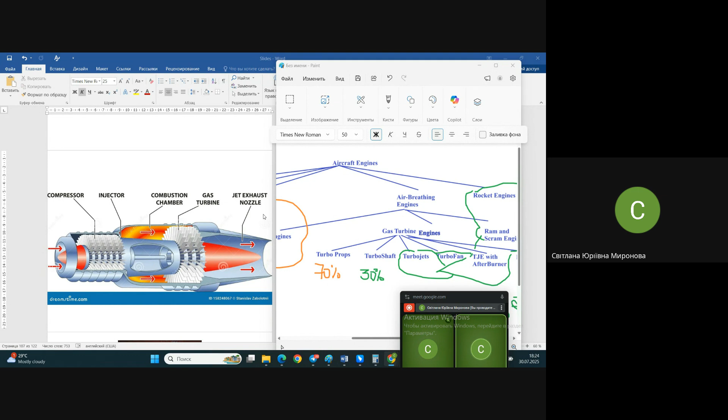How to rotate it? It's auto-rotating inside the engine due to the turbine. Hot air passes through the turbine. The turbine rotates because of this, taking a portion of energy from the air. It's placed, as it's called, on the same spool, you see right now. A combination of compressor and turbine mechanically on the same shaft.

And compressed air, turbine rotates the compressor, and compressor supplies a new portion of air. What is after the turbine, and how do we transfer this kinetic energy of air from high pressure into high velocity? This is also an interesting story.

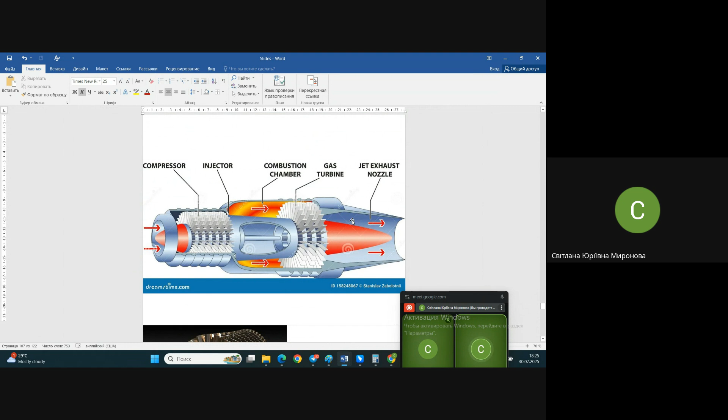Let me show you a picture; sorry, not successfully touched. But it explains very well what happens inside the engine and what I need you to pay attention to. It doesn't matter what exactly is given in this picture, but the top picture shows very well the geometry of the engine in general.

At the place of intake and compressor we have what's called a confuser, the shape which reduces the cross section inside the engine. Due to this, air passing through this place is losing velocity and increasing static pressure. Here is like the bottleneck, immediately in front of the combustion chamber. At the place of the combustion chamber, let it be the throat in this picture.

After this throat, with additional energy of fuel which is chemically transferred into kinetic energy of air, the air goes into the so-called diffuser. In the diffuser there will be, on the contrary, reducing of static pressure and increasing of the velocity of this airflow. That is the changing of parameters, not inside all the engine, it's only about one element of the engine.

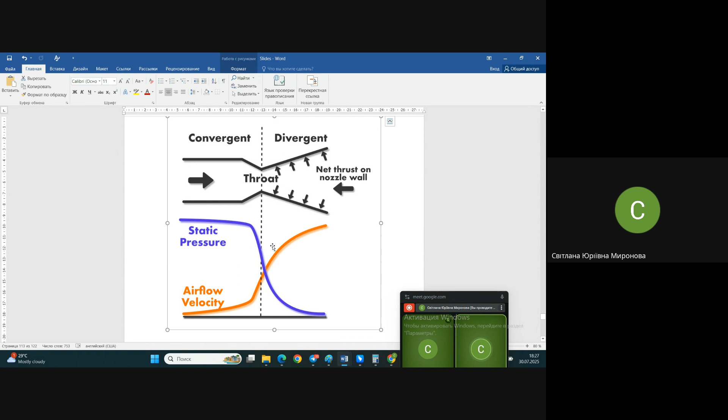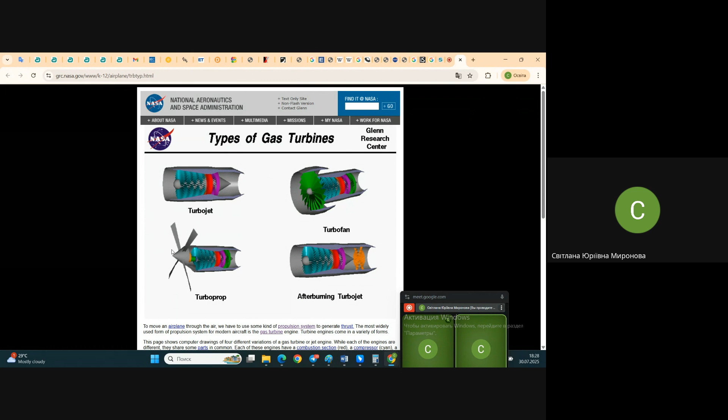Pay attention to the cross sections of all the engines. What we saw some seconds ago in that picture, now you see reproduced in cross sections of engines. At the end of the engine it seems like it does not correspond, it seems like it's reducing in cross section. But there is a so-called central body inside, and it creates a channel which near this cross section is much more narrow. Compare it here, it becomes greater and greater, so it's really a diffuser inside. And in any engine we see the same story: confuser, something like a throat, and next a diffuser which should increase velocity.

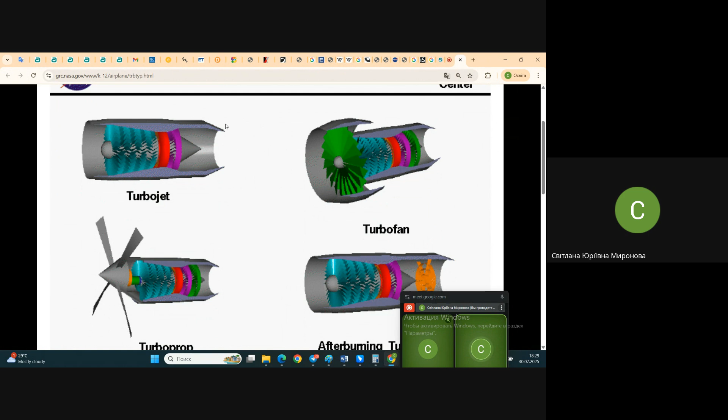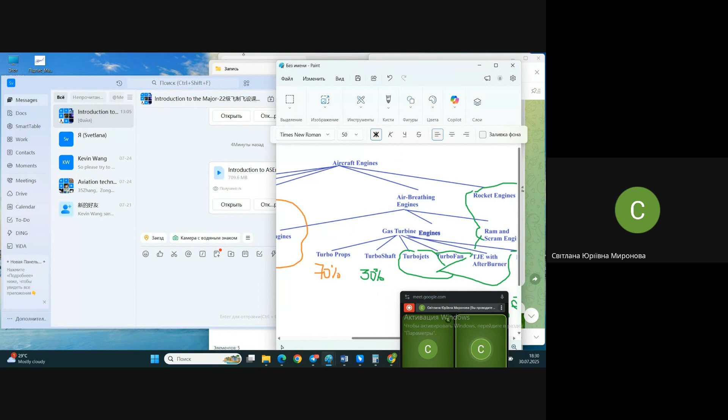The only task for us now is to understand how it works, why people torture themselves with improving those engines, why it's so necessary. Here I will leave the same site with some simulators; next we'll try to use it. Right now we will try to see something and try to understand my explanation. I hope I'll be successful.

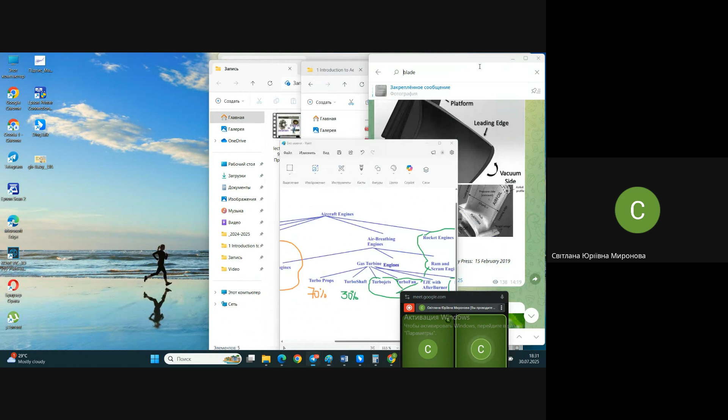I lost. What do I need? Oh, I have prepared. Okay, there is the gas turbine engine, and its general core we already understand, I hope, and the combustion chamber. Let me show you some pictures of the compressor, turbine and combustion chamber in real, not in beautiful schemes.

I lost it. I lost it. We will find it, no problem. Almost found.

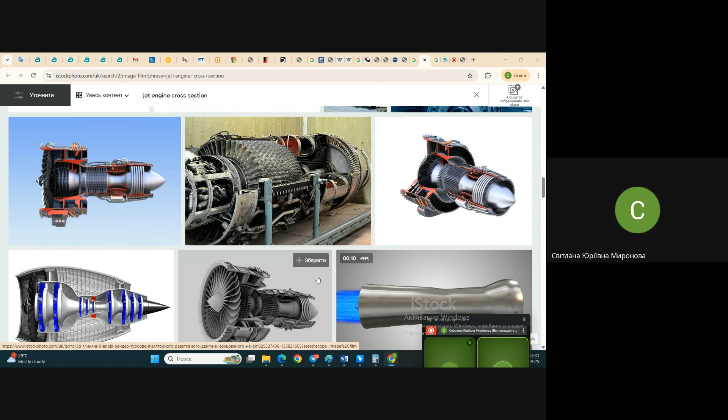Now we see a collection of photos proposed to be bought. You see real engines, similar to what we might see in our laboratories that our students use for practical classes. Compressor, and next some place that looks like cylindrical bodies. Pay attention, that is the so-called can type of combustion chamber.

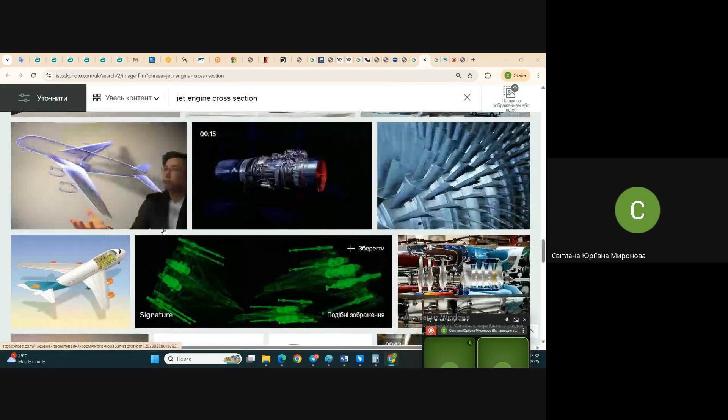What it looks like was visible here. Wait, disappeared. I meant to increase it and instead I spoiled everything. Here it is; I will not risk increasing it any longer. Look at this compressor. Next you see the throat immediately before the combustion chamber, and separate bodies, like separate capsules, cans, the so-called can type of combustion chamber. And next, the exhaust of the combustion chamber passes to the turbine, and the central body. What it looks like, here it is.

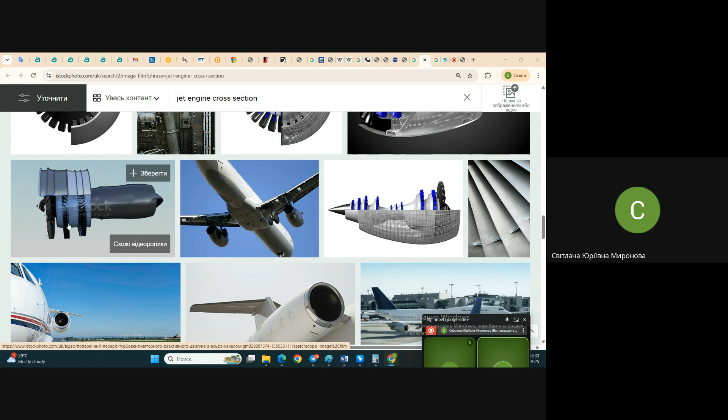Would you be so kind, please, to show? No, no, I have understood. Not much interesting actually for me. I've seen.

I have a video, and I'm going to send it to you. A video about a turbofan engine. At least here it's visible that the engine is all surrounded with additional systems, with pipes, with electrical systems, and so on. Let's close this and let's go into explanation.

I even tried to do it. I was training to do it before the class, so it looks more beautiful, let's say.

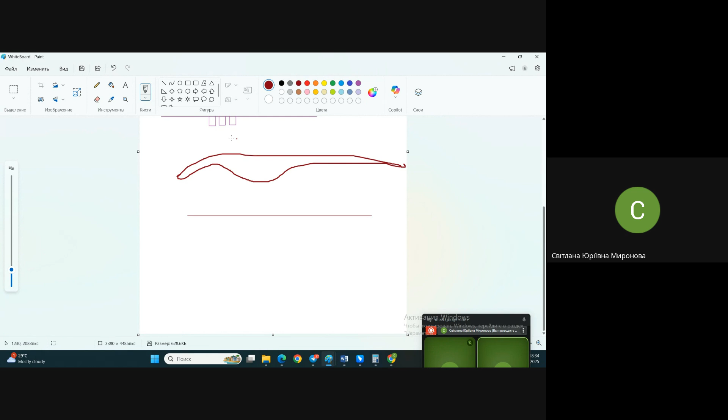Well, once again, we have an engine to make. We need an engine, and in this engine, somewhere in the housing, here is the housing element. And inside the housing element, we need to have first the confuser and next the diffuser. So usually it looks like this, and next is this housing element. And let's place it here. Somewhere here, it will be the combustion chamber.

We do remember. So somewhere here, there will be fuel nozzles. Some of them. The combustion chamber might be of can type, it's most typical, but it also may be the common combustion chamber, like the whole ring around the axis, around the spool of the gas turbine engine, and compressor.

Look, the compressor looks like this, approximately. We have seen it here in the photo. There are two different popular decisions. Both are popular. They have their differences, like advantages, disadvantages. Not the matter right now, but do remember that the compressor may be a so-called

axial compressor, through the axis. Air passes along the axis, not quite of course, but almost. And one more type of compressor is the centrifugal compressor, which looks like this. There you see it's a so-called multi-stage compressor. Each stage consists of a disc, and this disc is stuffed with blades. Now they are in radial directions.

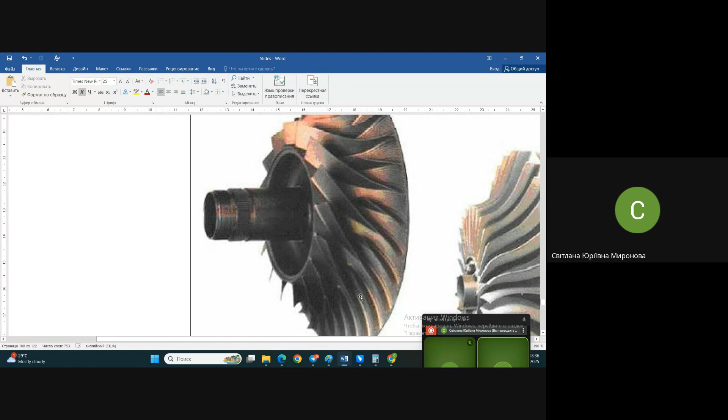In centrifugal, actually, those ribs, let's say, also have a blade-like shape, and this blade-like shape is additionally twisted to create complex ducts here. That one and that one, they are both placed in the confuser area. Either or. I've seen engines where it was hybrid. It means one portion of the compressor was made as an axial compressor and another one as centrifugal.

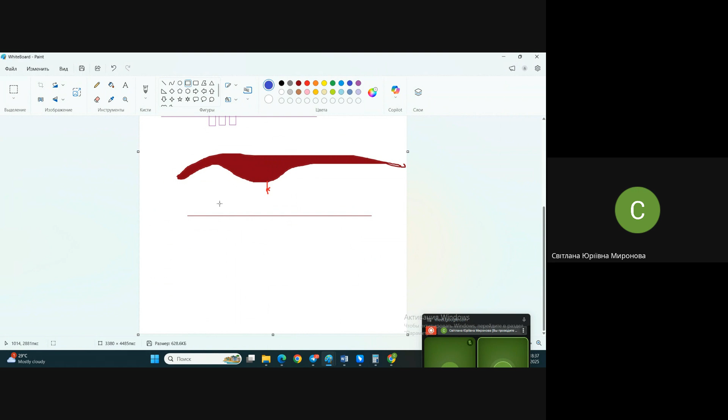Whatsoever, I will draw schematically. An axial compressor, not so important which one. And I'll draw it in blue color to emphasize that this thing is yet cold compared to the temperature in the combustion chamber. And I made now one stage of compressor here.

Next, I'll do here one stage of turbine, somewhere here. Let it be the turbine here. The turbine is necessary to rotate the compressor, we do remember. Everything is on a common shaft. I draw only the half, you understand. At some moment it's necessary to start rotation. Rotation has started, the engine is started, and next it's working on a continuous cycle of burning.

How to increase the thrust in such an engine? How to make it more efficient, more powerful, more capable? Maybe we need to give more fuel. We may give more fuel, but this trick will work only in case you have more air. So first we need more air. How may we get more air? One way is to increase the engine dramatically, and this engine, of course, will not be for an airplane at all. What is another way? A quite obvious way is to increase the amount of these stages, of these discs with blades.

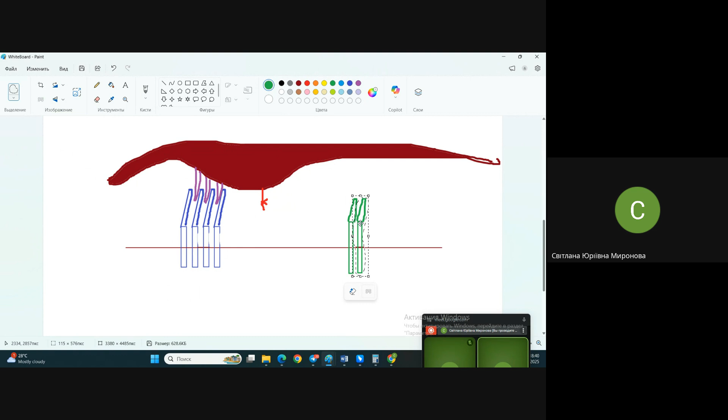I hope you understand it intuitively. What does it mean? Okay, we did it. It's quite clear that to rotate a heavier compressor, we need here a more capable, more powerful turbine. It also has increased. And a similar matter is with the turbine. It also has additional blades here. It's ducted in a special channel usually. I might even show you what it looks like.

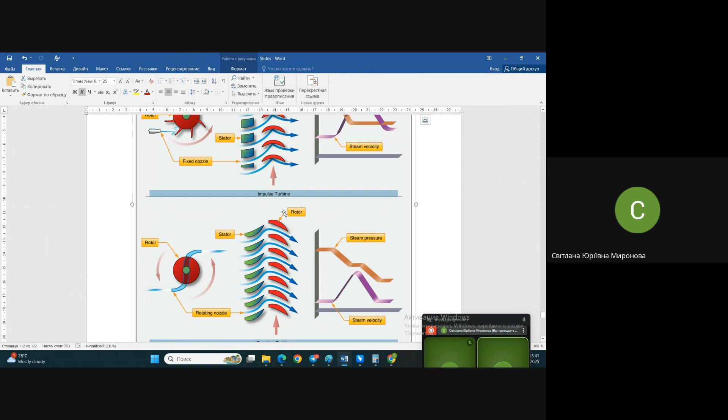I place it here. And you see, there are different types of turbine blades, but mostly, you see, this is the rotor of a turbine. Mostly they look like quite typical airfoils directed in the direction of flow, let's say. In contrast to the compressor, whose blades are also blades, but they are not so similar.

It's a very complex structure with inner holes for cooling. Why does it need holes for cooling? Because it's subjected to dreadful temperatures. How is it not melted at all?

It's so-called aerodynamical twisting, so the angle of attack is changed along the span, let's say, along the length of the blade. By the way, it's similar to the propeller of a turboprop engine, which is in front of the engine. It also looks like an aerodynamical airfoil, each blade of it, and this aerodynamical airfoil is twisted along the length of the blade.

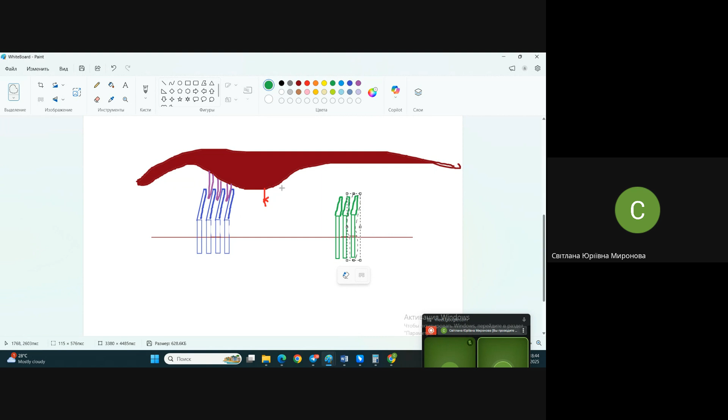Is there any other possible way to increase the capacity of the engine in this case? What people understood with some time.

One decision was: maybe we may compress, we may suck more air than necessary at this place, and burn only part of it. Most of the oxygen in the air will be burned and used here in this combustion chamber, and some portion of air still containing oxygen may be additionally burned in another place, in the afterburner, after the turbine.

And this resulted in the appearing of the afterburner chamber in the engine. So the turbojet engine and the turbojet engine with afterburner are very similar. The afterburner is just an additional combustion chamber at the end.

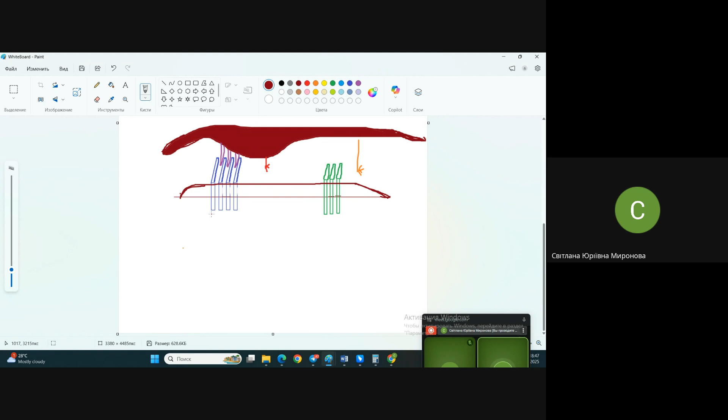Well, so that's not the way for passenger aircraft and cargo aircraft. What we really wish to have, once again, we need here velocity, high velocity.

How to increase the thrust of the engine. One way is to increase velocity, and another way, an extensive way it seems, is to increase the amount of air at this velocity. Somehow to increase the amount of air that passes through the engine. It's not compulsory necessary to burn this air.

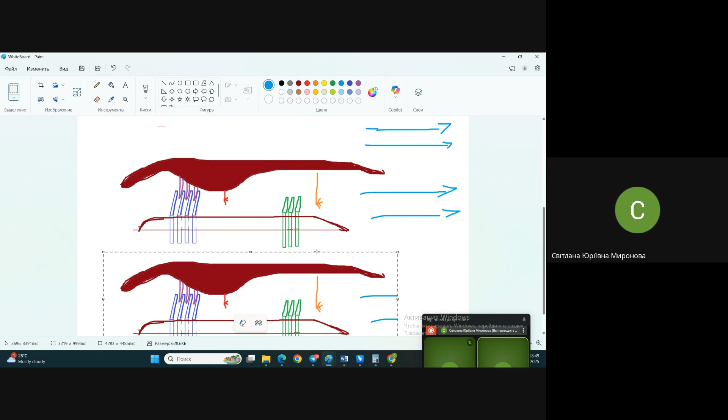We just like to accelerate this air somewhere in the engine and push it out. And what people did, understanding this, let's copy down this thing. Wait a second. I hope I do it. Oh, I did.

In order to place an additional element here... let's place it in front of the compressor. You remember we may use props. I already said a prop is efficient only up to some speed and up to some altitude, just because of mechanical strength matters. If speed of rotation needs to increase - once again, the problem is that 70% of thrust is created due to rotation of the prop in such an engine, turboprop engine. And to increase thrust, you need to increase either the size of this prop or the rotation per minute of this prop.

This is in order to give more air and more speed to this air. Increasing size of the prop? No, I already said you need to compare the size with the size of your airplane - maybe the prop will be too big. Increasing speed of rotation of the prop? It may mechanically break due to rotations.

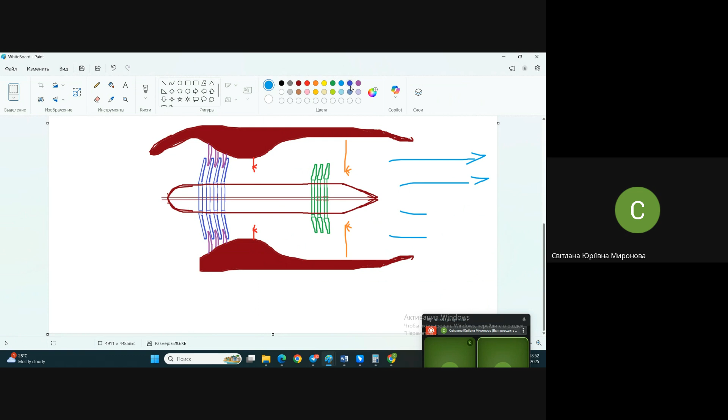In front, let's come back to this picture - in front of a compressor, let's place something, like this, little. Let's place an additional device, the so-called fan, and it has already only one stage - there's no need for several stages.

This fan is shorter in diameter than it was in the turboprop. It also looks like a prop, but this prop is more similar to the turbine, more similar to the compressor. It has a large amount of blades. The blades are shorter and they are hidden in a special channel.

Let's do here something like the beginning of the engine - they are hidden in an additional channel, and this channel is also profiled with respect to the rule that first we need... I will not try to draw it beautifully, I will just stop drawing at some moment. So here we have, as I said, something like additional housing with respect to the turbojet engine that looks like this.

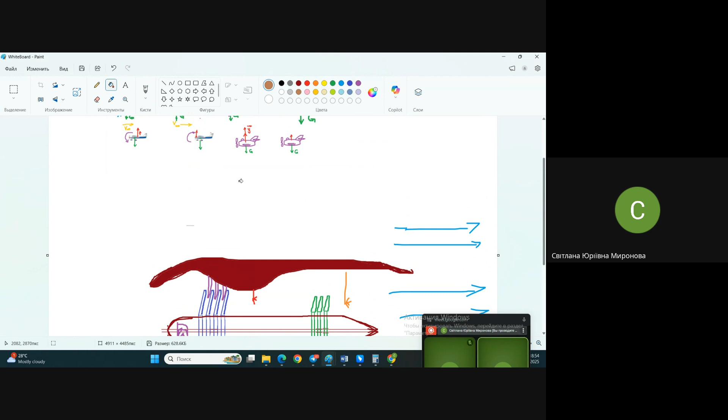Here we have added an additional element in front of the compressor. This element is named fan, and the fan also rotates together with the compressor. It rotates with the same rotational speed as the shaft itself - no gears, no intermediate devices between them. It just rotates, and rotation of this big fan results in passing air in two ways.

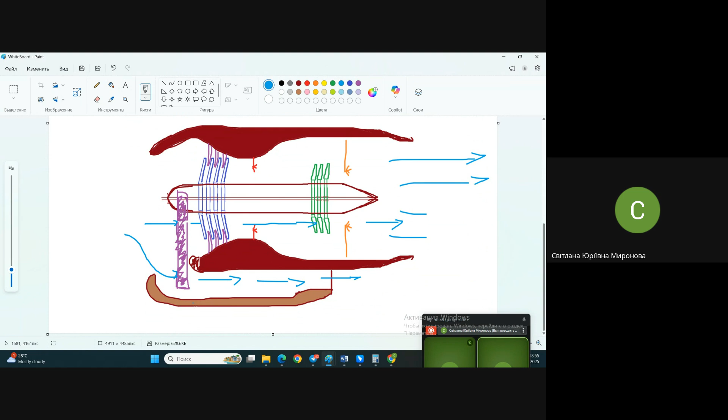A portion of air still goes through the inner duct of the engine like this, but another portion goes through the outer duct here, which is also profiled for the purpose of - not compressing air - but for the purpose that air velocity at the exit will be higher than air velocity at the beginning of this duct. So it's also profiled somehow.

And what is the result of this? When here we had accelerated air - for instance, at the top we had accelerated air symbolically, I show it twice now here - here we will have an amount of accelerated air through the hot channel, the so-called inner duct of the engine, and through the cold channel.

So some portion of air makes a bypass, passing by the engine, not through the engine, but by the engine. That is why those engines also have another name: bypass engines. The turbofan engine, in literature, somewhere on the internet, you might find it under the name bypass engines.

These bypass engines have a very important characteristic called bypass ratio. What is bypass ratio? It's the amount of air - let's show it symbolically - amount of air passing through the outer channel, let's call it cold, to the amount of air which goes through the inner channel, which I symbolically showed with another color, let's call it hot.

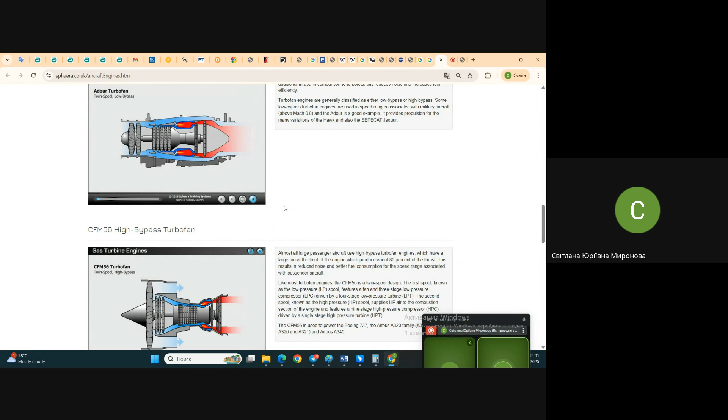What is visible here? Look, both engines are turbofan engines. Pay attention, it's visible — it has an inner duct, where the compressor is, and some air comes through the compressor to the combustion chamber and to the exit. And the outer duct you see here with the fan is so-called low bypass. Practically, this fan by size doesn't differ much from the compressor size.

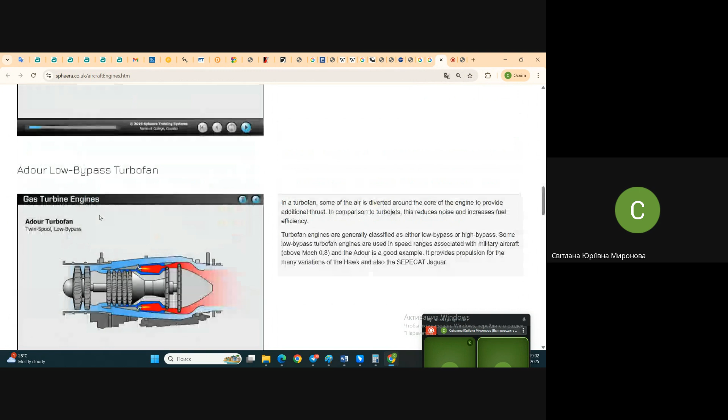Why it's called twin spool, by the way, I forgot to say — there is a so-called low pressure compressor first, and next a high pressure compressor. After each stage of the compressor, pressure increases and increases. Here is a two-stage turbine also, you see. The first turbine is mechanically joined with the high pressure compressor — this is the so-called high pressure turbine. And the second one, respectively, is inside this shaft, inside this spool, passing to the low pressure compressor stage. All of this rotates at different speeds.

And here we have mechanical joints also with the fan — the same type of engine, but another bypass ratio, and you already see what it looks like. Pay attention also to what is visible by the way — the intake bodies. You see the central bodies in the exhaust channel here, and they are not visible to compare, but here the intake central body of two engines is visible.

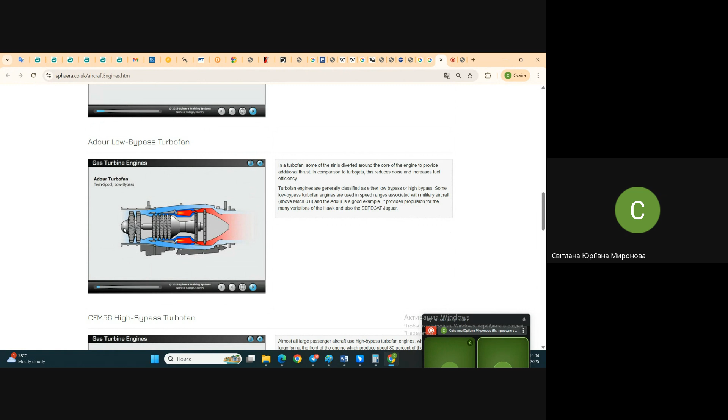How do you think — which one flies faster? Which one is for faster airplanes? Your propositions... you can't answer me right now. So, you understand the more sharp, more thin shapes correspond to higher speeds. You have seen this in examples of profiles, in examples of aircraft shape. And here is a more circular, more flat, let's say, central body on the intake. It means that this engine is designed to work with lower flight speeds.

I hope that we don't need any longer, and let's continue this story. Now, about bypass ratio engines, I hope I explained it to you. Additionally, I'm going to send you, as I said, a short movie. This short movie seems like an animation for children — it's a very simple, understandable explanation, and it's not boring, in contrast to my explanation.

Once again, we have an engine, a turbojet engine. Let's take a look, let's recognize them, let's look at the different engines.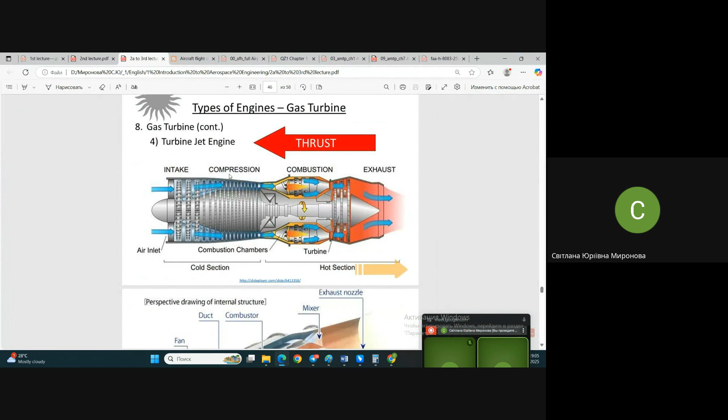Here is a simple turbojet engine. Oh, simple. It's simple, people. Trust me. That one is simple, with an axial compressor, with a combustion chamber next, and turbine, and exhaust channel, of course. Intake, compressor, combustion chamber, turbine, exhaust.

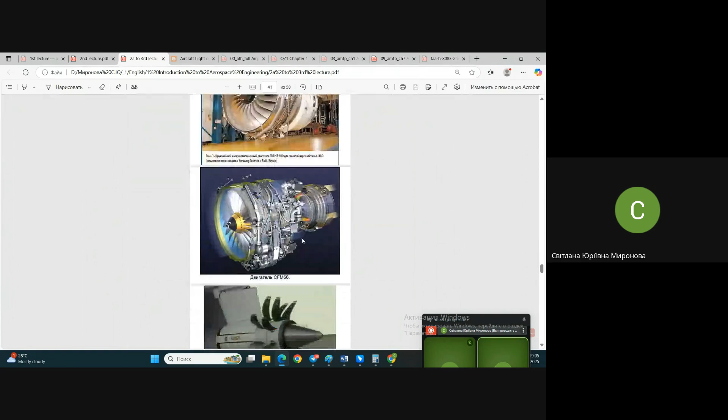Turbofan engine. Where is it? Where has it disappeared? In cross section. Turbofan engine. No, it's not cross section, but at least we see its typical shape. It's like with a big head, and a thin waist, and next some legs, for instance. Typical appearance, and in the scheme here is the fan, turbofan engine. Look at this. Very well visible.

Also, compressor, two stage. Symbolically, it's shown one stage of compressor here. No, two stages. Low pressure compressor given like an axial compressor. Next, high pressure compressor is a centrifugal compressor, and after the combustion chamber, you have two stages of turbine, respectively. The inner one is joined to the inner compressor, so they correspond to high pressure, and they are working with high pressure. And the outer ones, both compressor and turbine, are working with low pressures.

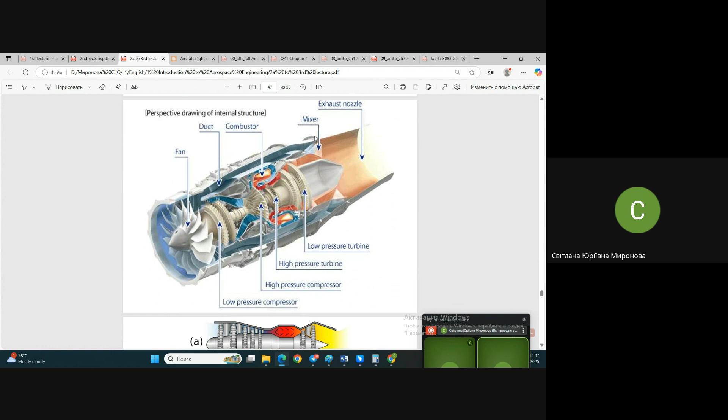And the fan in front. And you see symbolically it's given that air passes partially through the inner portion, and it's hot, and partially through the comparatively cold channel, and of course it's cold at the exhaust channel. And I should also add that different designs of engines may be in the exhaust chamber, in terms that cold air and hot air may be joining together, or on the contrary, they may go completely separately. And what is better, what is worse for different speeds, it's another story.

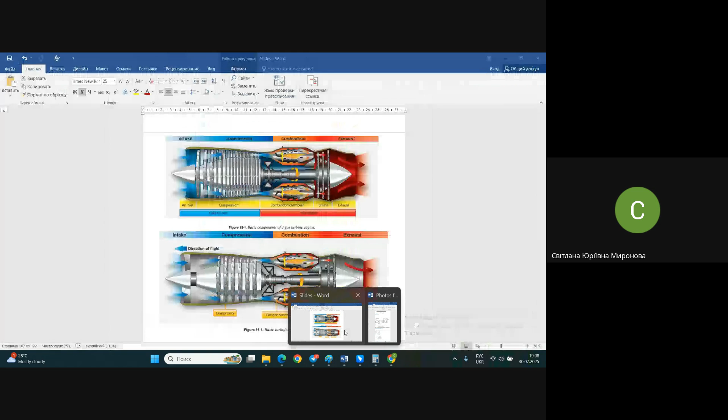Next, that one I hope we somehow understand now, the principal difference in their design. Next, what I propose you to take a look at. At the top, what is it at the top? Once again, when I open the picture, this picture we've seen already. Do take a look, like a scheme of the inner duct of an engine. And once again, what here is symbolically visible.

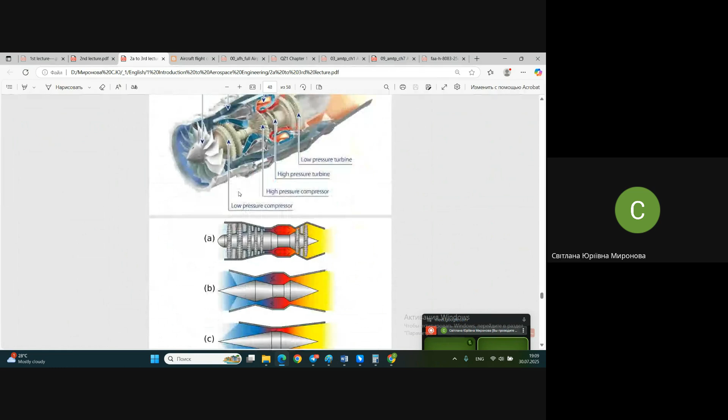Inner duct, first we have a confuser, next a diffuser, some stages of diffuser, and air goes out passing through this core of the engine, it's a rotating core, and watching the real photos and schemes of real engines, we understand it's an extremely heavy thing actually, and to rotate it is not a simple task. It spends a lot of energy, a lot of kinetic energy to rotate these inner guts of these engines, let's say.

May we work with these shapes of inner ducts in such a way that air is first compressed, next we add the fuel, of course, in order to increase the energy of the flow, and next it's expanded and expelled outside? Is it possible? Yes, such engines exist. Look, it's the so-called ramjet and scramjet engine. Look, it's empty inside, completely empty. Here is a device.

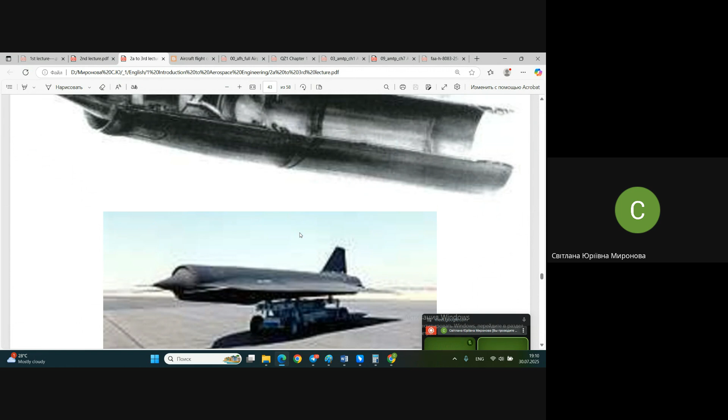It's an unmanned flying vehicle made in the USA, Lockheed, purposed for reconnaissance. It's the 60s of the previous century. And look at the engine this thing is using. The engine is simple and empty inside. It's just a profiled duct inside. Some central body, you see it's sharp, it's for supersonic speeds. Here is a combustion chamber, and next it's just the exhaust channel. No problem. Great engine, very simple.

It seems very weight effective, because it will certainly have less weight than a heavy gas turbine engine. The only problem is how to make air compress, how to force it to squeeze through this place. In order to start working, this aircraft with this engine first should be sped up to very high velocities, better supersonic.

So it may work, yes, but it starts working from Mach 2, 3, not at the beginning. It's not possible to start it like with the takeoff of an airplane when you have no velocity yet. It doesn't work at this moment. And yes, such an engine may be used, but it means that first you need to accelerate your aircraft, your airplane, or whatsoever you have, to a very high speed. And it means that it comes again to a hybrid power plant.

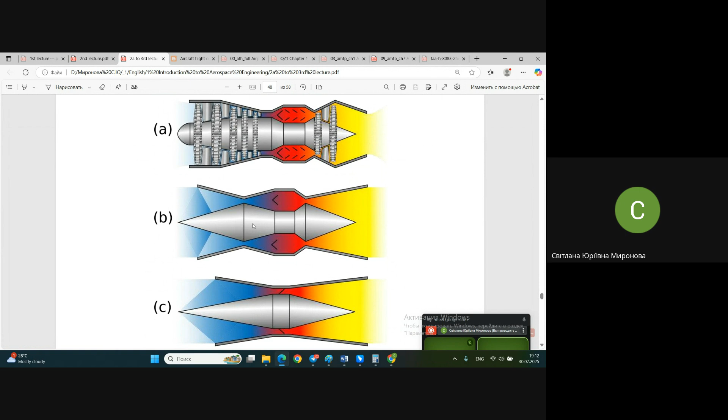As I already told you, the English literature describes those engines as ramjet and scramjet engines because they have differences in the inner design of those ducts, and they are used for different ranges of speeds. But in our language, if I use direct translation, they are called straight flow engines, engines of straight flow. They are not in the group of gas turbine engines, we understood it, but they are in the group of jet engines anyway.

They are for supersonic, better hypersonic speeds, and they start working only at supersonic speeds. In order to use such engines in an aircraft, whatever the aircraft is, first it's necessary to accelerate the aircraft somehow up to supersonic speeds. More probably, in this case, a hybrid power plant is used. Actually, we even have an example of such an airplane. Also, it was a reconnaissance airplane of the USA.

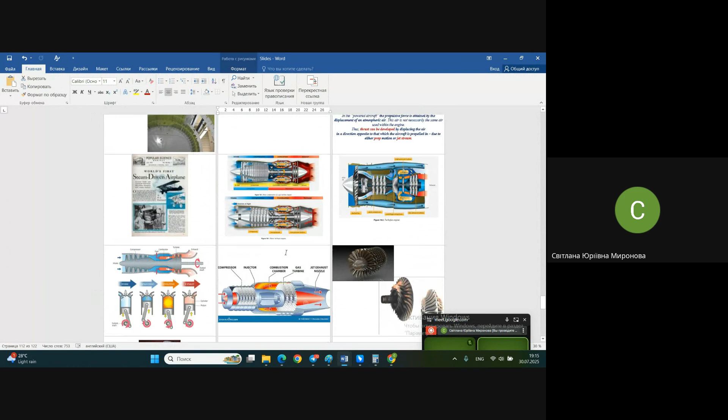Well, it was about engine types. I hope I practically haven't missed anything. Let me check what I'd like to say to you. No, seems like not. A lot of these beautiful pictures, as I said, everything is great. The internet is full of those pictures, and you may use it for your own.

And I need you to have a strong understanding in your heads that all those engines are different. Yes, design is different, principle of operating may be different, but what are they different for us with? They are different with characteristics like the amount of thrust to the weight of this engine. First, like a relative thrust, relative to the weight of the engine.

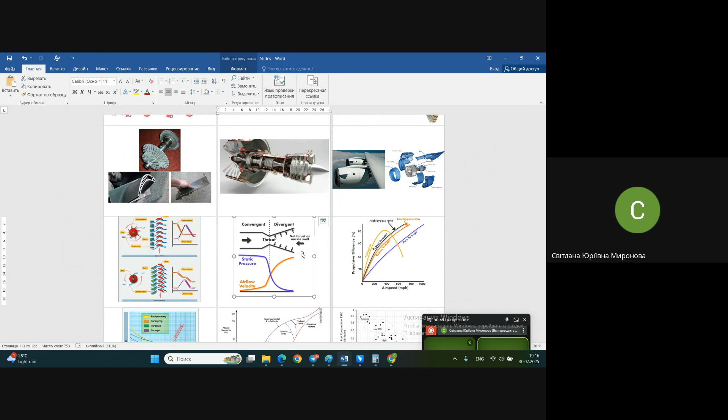Quite clear that we'd like to have more thrust with the same weight of engine, for a more efficient airplane. And it means that this relative thrust should have higher values. This dimensionless value should be higher. No, it's not quite dimensionless. Doesn't matter. If you compare two engines, compare thrust to weight, which one is better? Theoretically at least, where this ratio is higher.

And one more important characteristic, not quite clear that this characteristic is at the first point, because it's a rule for any airplane, this minimum of mass, weight efficiency. And the next consideration is the fuel consumption, of course. When does this consideration work, when is it important? For instance, for military aircraft, is it important or not? No.

When it comes to military airplanes, no one counts the money at all. It's expensive. Okay, it's expensive. It costs how much it costs. Doesn't matter, if someone is ready to pay for this, of course. But when it comes to passenger aircraft, cargo aircraft, it's your money. You spend this money, and of course, you don't like to spend more.

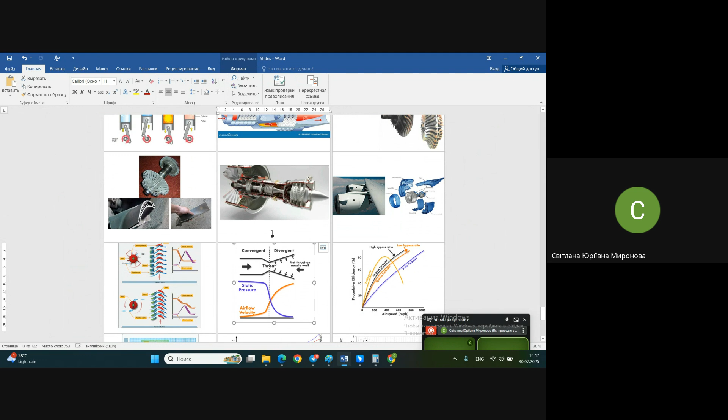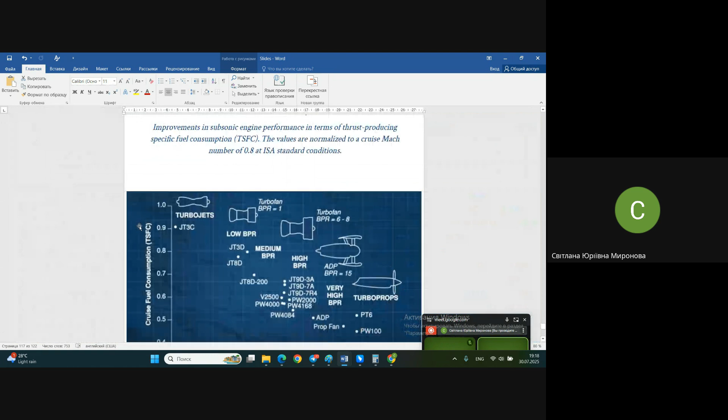And in this case, we need to see some pictures right now. It's about limitations of engines. That one. Fuel consumption. And I will just draw for you some things. I didn't find them exactly in the way that I got used to in our books, in our language, so I will draw it. I took it from different places, and there are two sorts of pictures here. On one hand, it's about limitations, about the area of using engines, and on the other hand, it's about fuel consumption.

That one, it's about fuel consumption. Thrust specific fuel consumption. You see the English abbreviation TSFC, thrust specific fuel consumption. What does specific mean? It means the amount of fuel to the amount of thrust produced by the engine. It may be given in different units. In our country, usually it's in so-called metric units, in the international standard. In some countries, it's given in pounds, in horsepower.

By the way, traditionally for piston engines, even now, their thrust is compulsorily given in horsepower. Actually, all the engines have this horsepower equivalent in brackets. They have it in force, like in newtons, and also they have it in horsepower traditionally.

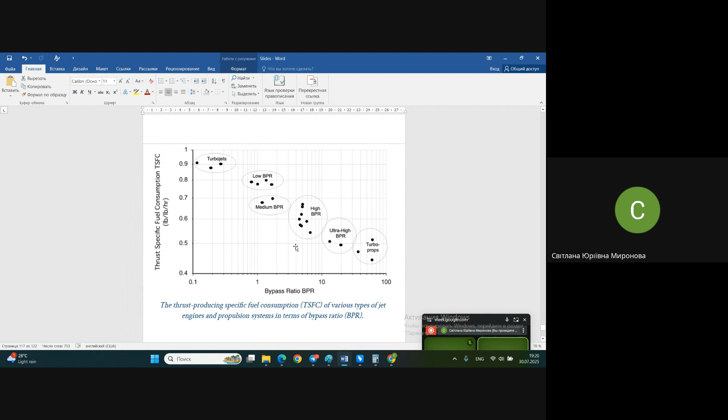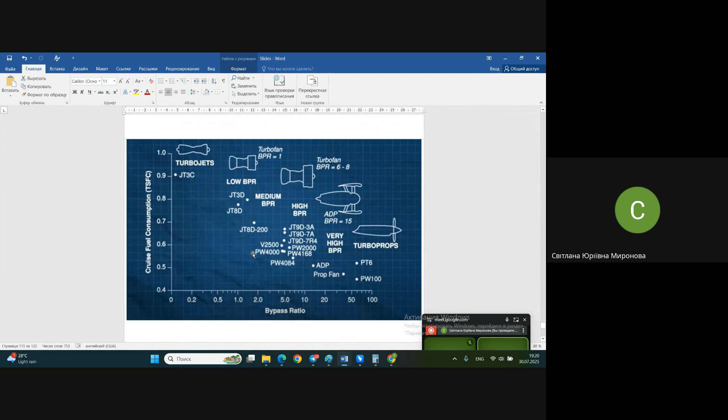And let's see, where is it? Not this one. I had it. Cruise fuel consumption. I love this. I took it as a screen from a short movie about engines, because it's visible what the type of engine is, let's say.

What we do see is that engines have different fuel consumptions with respect to different speed, let's say. And the worst are not even shown here. Look, the worst are turbojets. Turbojets with afterburner will be even worse. They are not shown here in the picture, but they will be even worse. Turboprops, you see, have less fuel consumption. They seem to have more efficient consumption of fuel.

What is the reason that we do not use them everywhere? Next you see that turbofans are next with respect to the turboprops, they're intermediate in fuel consumption between turbojets and turboprops. And the higher the bypass ratio, the closer they are to the turboprops.

Quite normal bypass ratio, not what we started from, which was 1. A bypass ratio of 2, 3, 5, 6 is already quite a common engine. It's a normal engine. You see, a typical modern passenger turbofan engine has a bypass ratio of not less than 6 to 8. It's a normal bypass ratio. Of course, they are much bigger in size; pay attention to the turbojet and to the proportion of this turbofan.

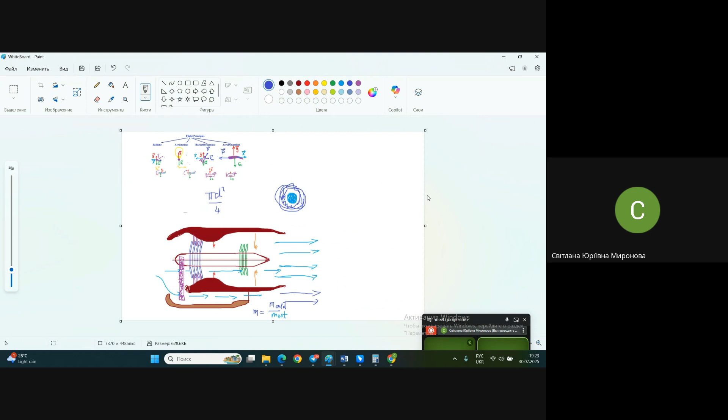Let me draw approximately the chart of this fuel consumption in the way I'm used to seeing it and drawing it for my students. Actually, usually we draw it even with values. No, sorry, not right now with values. Now it will be qualitative. This characteristic is usually designated in our literature as CP. It's thrust specific fuel consumption in English literature. And it depends on the speed, the Mach number.

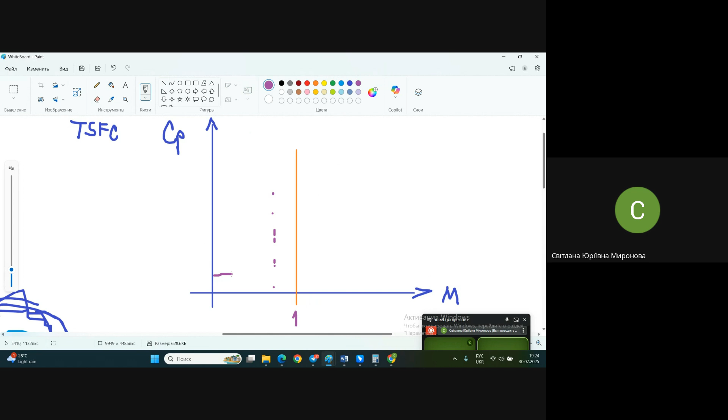Let it be here somewhere. Mach number 1, let it be somewhere here. And the fuel consumption, as we have seen in the previous picture, of the turboprop engine. Of course, it doesn't start at 0. Mach number 1 is somewhere here. And it starts somewhere close, like this. In the transonic area, the turboprop engine starts growing fuel consumption, and at some moment it just doesn't work at all.

When it comes to turbojet engines, they behave in a different way. Their fuel consumption is much greater. Let it be this color, for instance. Since the beginning, it starts somewhere here already, compared to the turboprop engine. And it's practically stabilized, like this. It's not an ideally correct curve I'm drawing right now. Practically it's stabilized, and then it's practically the same at cruise speed. Not ideally parallel to this line, something like this approximately. It's a turbojet engine.

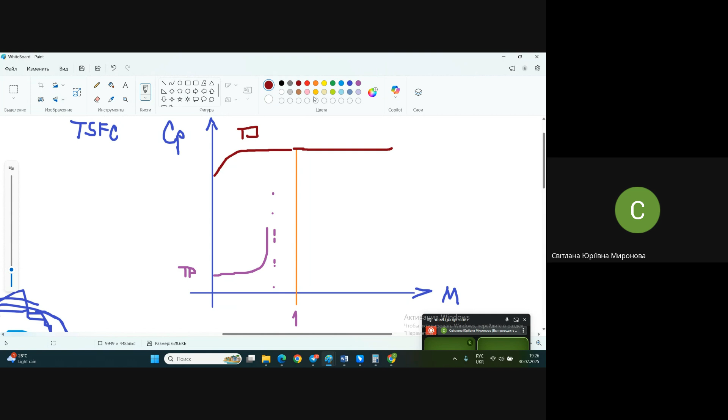Okay, I will not try to type it completely. Turbojet engine. Turbojet with afterburner: it will be much higher. It will be somewhere there, not outside already. Yeah? It's turbojet with afterburner. Quite clear, because we're adding fuel. Yes, we have more thrust, but we spend much more fuel.

What about the engines with bypass ratio? They have an intermediate position with respect to the turbojet. Let's start somewhere here. And the problem is that at this place they seem to be not so effective already. They start consuming more fuel. They are about to stop breathing at this place. Bypass ratio 1 is rather close to turbojet engines, significantly less, but rather close. And the more the bypass ratio, let it be 2, the closer it is to the turboprop. But it still continues to work when the turboprop has already stopped working, you see.

Let it be bypass ratio 5. The higher the bypass ratio, the greater the overall size of the engine, but the closer it is to the turboprop, and it's still smaller in size than a turboprop of the same thrust. And the turboprop has actually already stopped working because it's not able to fly faster than 0.8, for instance. It's not able to give thrust at transonic and supersonic speeds at all. Only jet engines. It has a limit.

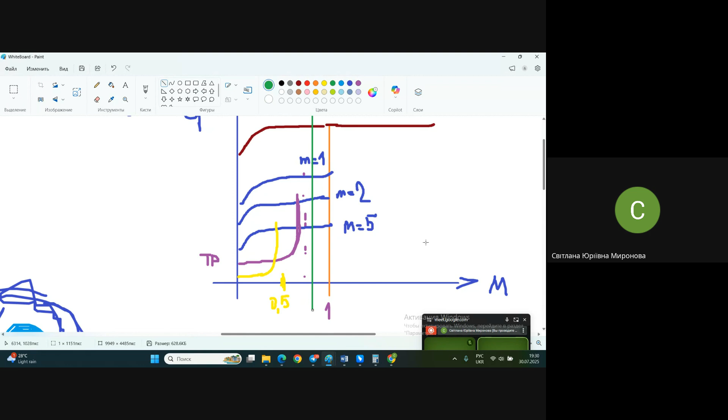And if we go further, somewhere closer to transonic speed, in this case we have an obvious choice, the bypass ratio engine. No, turbofan engine, correctly. Well, now after understanding this, let's continue. And I forgot to mention, I do not show them in this area. They are not comparable with air-breathing engines of gas turbine type and of piston type. Ram and scram engines will be somewhere in this region of flight.

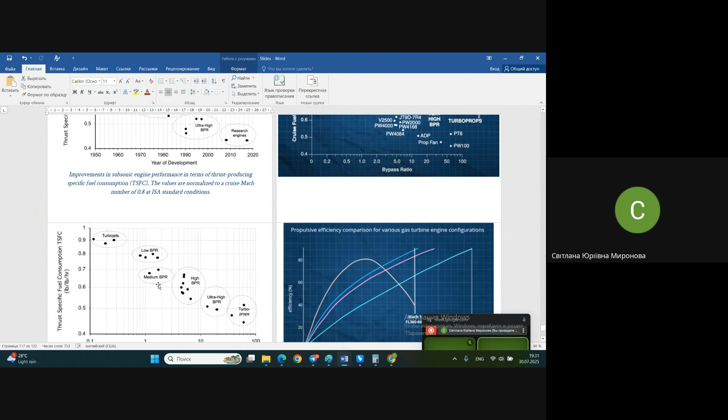And for this, we are going to draw one more chart with limitations. I will show you where in the slides you have a similar story explained. That is thrust specific fuel consumption here and there. It's practically the same. It's taken from two different sources, but you understand it's very similar. I hope you've noticed it. No, not quite. Sorry. This one and that one. Look, here it is visible on this chart. I took it from different sources, but let me align them together.

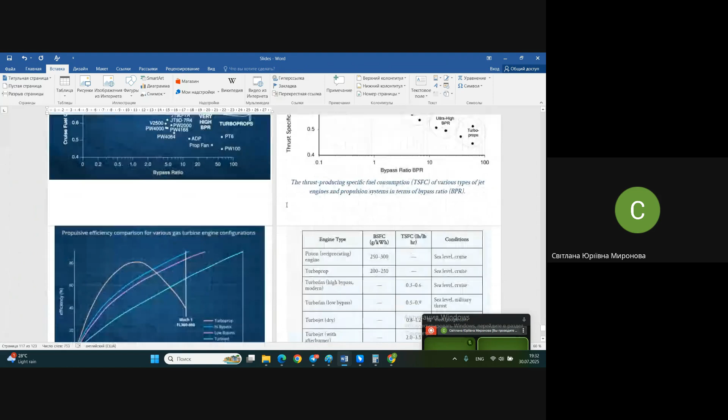I'll do one trick right now. Oh, did I? Once again. Great. Aha. Now they are aligned. Fuel consumption and fuel consumption. It's the same information about different areas of use due to fuel consumption of turbojet engines, bypass engines, and turboprop engines. Piston engines and some other types of engines are not mentioned here.

Now, take a look at this diagram. It's the so-called propulsive efficiency for different configurations depending on the airspeed. Somehow it reflects the story that we have already seen when I drew it here, this story with limits. Let's try to understand it. Again, they didn't show the piston engine here. The piston engine will be approximately somewhere here. This curve will fall down earlier. Here we see airspeed, in miles per hour.

I hope you remember from previous classes, approximately 1,200 kilometers. It's Mach number one, the speed of sound. Mach number one. And I had no idea why Mach number one is given here like this. Because it's not in kilometers, it's in miles. Do forgive me. A mile is greater than a kilometer. It's around 1.5 kilometers: 1.6 kilometers if it's a simple mile, and 1.8 if it's a so-called sea mile.

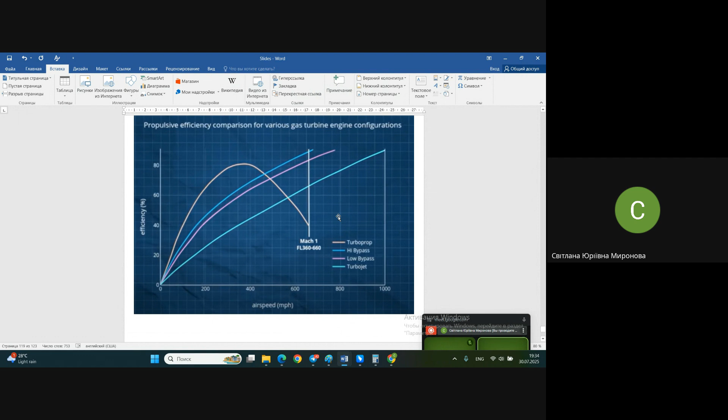What they try to show here: turboprop propulsive efficiency was high enough in some area and then sharply falls down. How they calculate this efficiency is just another formula. It's not a direct understanding like how much fuel with respect to the same thrust. And here is shown what is more effective in different areas. And if a curve is stopped, it means that the engine is not able to work properly further.

Do pay attention. What engine is able to work beyond Mach number one, at supersonic speed? Among the engines mentioned here, only the turbojet engine is able to work with an airplane at supersonic speed. You see, the low bypass engine is not so fuel efficient, but it's able to work at higher speeds than the high bypass ratio engine. It consumes more fuel, as shown in another chart, but on the other hand, it's able to work at higher speeds.

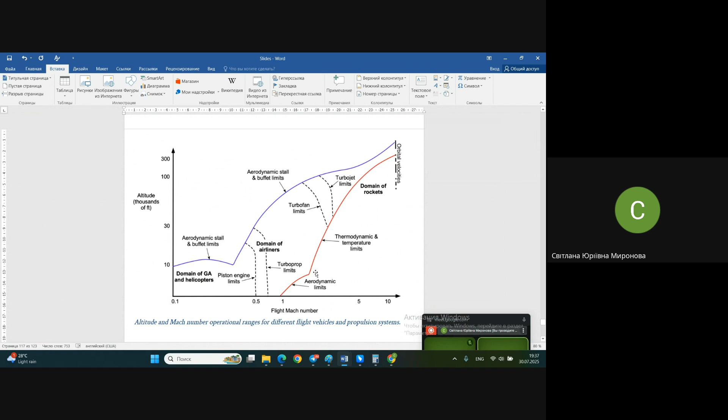And to continue the story, first we need to come back to one of the first pictures with diagrams. That one is the so-called altitude-speed diagram of different engines' use. What does altitude-speed mean? One axis is altitude of flight and the other axis is speed of flight. Here it is given approximately in Mach numbers. It's more convenient than recalculating speed at different heights to understand what effect we're dealing with, subsonic, supersonic, and so on. Now let's try to draw such a diagram together, at least approximately, so we may understand this picture better.

Let's try. So we have heights, altitude, and we have Mach number. And we have the formula of Zhukovsky. I hope you remember.

Cy, kinetic energy of flow, and area of wing. And the same is, but with Cx and area of middle is for the drag. Well, the height and Mach number.

Now, when we have zero speed, we have no lift. It's understandable, yes? And on some height, with changing the density of air, here is the density of surrounding air, air is less dense and it's not enough, it's not tight enough. Let's say if you fly with low speed, you have no lift in this area. Usually this curve looks like, in that picture it is given in a little bit more complicated way. I'll show you right now.

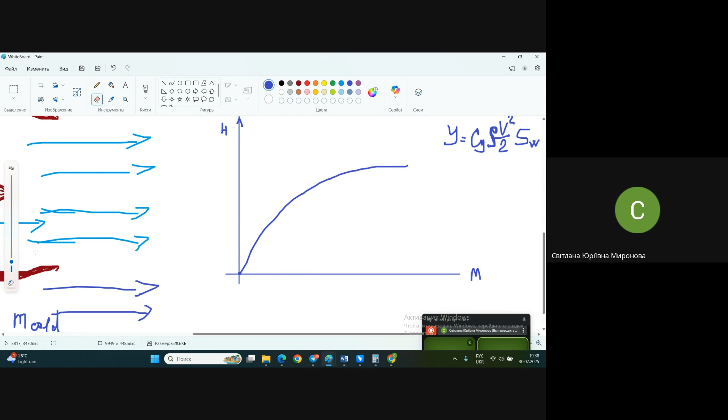So higher than this curve we can't fly because we just have not enough lift. Near the ground we may fly with comparatively low speed. If we gain height, with the same speed we have not enough density. So that is the upper limit, and this upper limit approximately looks like this.

Okay, let's fly faster. If we are limited to fly higher with low speed, let's fly faster. But as soon as we start flying faster, we have one more problem: aerodynamical heating, overheating of the surface. And if we fly faster in dense air, it may result in the melting of our airplane. Not literally melting, but you know that with changing temperature, structural materials change their strength, reducing with increasing temperature. It's a principal law of any material. And if airplane temperature rises, the strength of material is reduced and the airplane is not able to withstand outer loads.

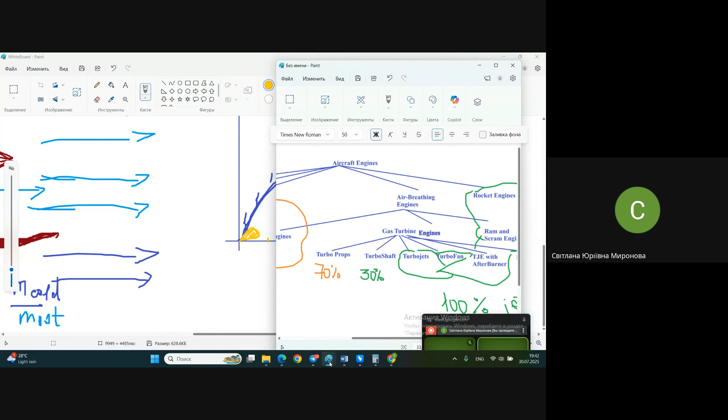You may use piston engines for Mach number less than 0.5, it's around 0.4. And for altitudes, literally 5 kilometers, not more. Take a look in the diagram. In the diagram here, you see, they show this curve a little bit higher. In the literature that I used to read and use in our classes, I know that piston engines are limited in heights and they are not able to reach 20 kilometers, for instance. So maybe I just misunderstood this chart, or maybe it's a bit wrong because it was given not in a textbook, it's given on the internet, and what is given on the internet is not necessarily correct, not necessarily honest, let's say.

Here is the purple one, turboprop engines. I hope you do remember what I said. I said that they are able to efficiently fly with speed up to 0.7, 0.8 Mach number. So they are limited on this side, Mach number approximately 3/4 of the speed of sound, and they are also limited with heights around 8 kilometers, if I'm not mistaken. So the next area is the area of turbofan engines.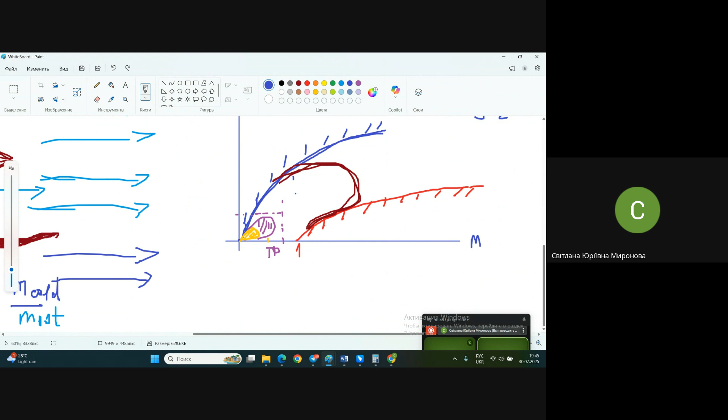Where are these turbofan engines, the blue color? Depending on bypass ratio, they are somewhere here, not exceeding Mach number one; it's already overestimated, do forgive me. They are not purposed for supersonic speed. And with higher bypass ratio they will be closer and closer to the turboprop engines. So they are approximately in this area, extremely efficient, but not able to fly fast and high. Extremely efficient in fuel consumption, in the economical meaning, in case we need to save money.

And look what happened. Seems like this area where we have no limits by lift, by stall, and by aerodynamic heating, here is the area where we may fly. Yes, it's not reachable. It's not taken by any other engine.

Actually, I forgot those RAM and scram engines. Let's give them some crazy color, like pink, for instance. They, of course, are able to fly much farther in speed because they are purposed for supersonic flight and for high hypersonic flight values, let it be even Mach 5, 6, even 10.

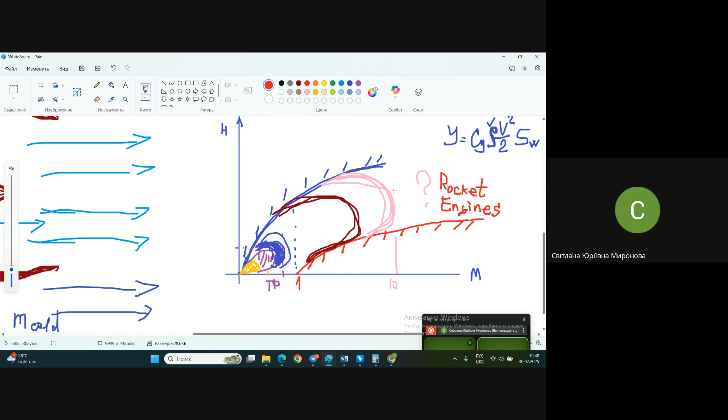And there is also information about rocket engines. As I already said, the rocket engine has no communication, let's say, with the air. A rocket engine looks practically like a combustion chamber. If I draw it here... oi, oi, I have no place now. Okay, let's make place.

It looks like this - I draw it now in vertical position, like for a space rocket. Combustion chamber, and this combustion chamber - you remember already those stories about confuser, diffuser - it's finished with a diffuser of specific shape, the so-called Laval nozzle.

And how does it work? It's necessary to burn fuel here. Fuel supply - okay, we have fuel supply inside, somehow it's injected. But to continue this chemical reaction, burning, it's necessary to have, besides of fuel - here we have fuel tank, for instance - besides of fuel, we also need what?

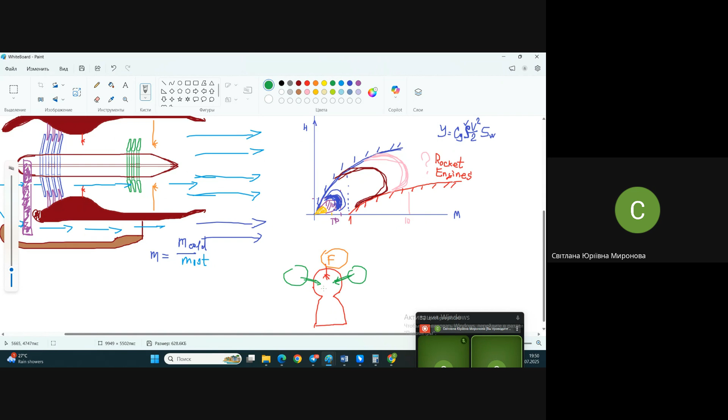That is why usually the oxidizer is already on board, and the fuel tanks are separate, oxidizer tanks separate. They supply both oxidizer and fuel into this combustion chamber, and after the fuel is burned - let it be a flame or something like an explosion inside - it creates huge pressure. This accelerated gas, not fuel, forgive me, this accelerated gas goes outside, and due to the shape of the diffuser, it's accelerated even more. On the exit it has very high velocity. Here it has great pressure, and here it will have high velocity. That is the idea of the rocket engine.

And rocket engines, as I already said, are used in the area where air breathing engines are not able to work at all. What a rocket engine looks like, if I'm not mistaken, is given in the book somewhere about aircraft engines.

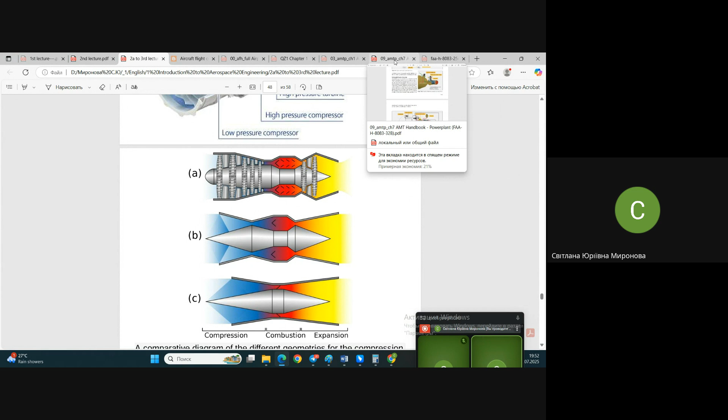It's about propellers, it's about - maybe I'm mistaken, maybe not, because as I already said, those books are for pilots. They have more practical purpose, let's say.

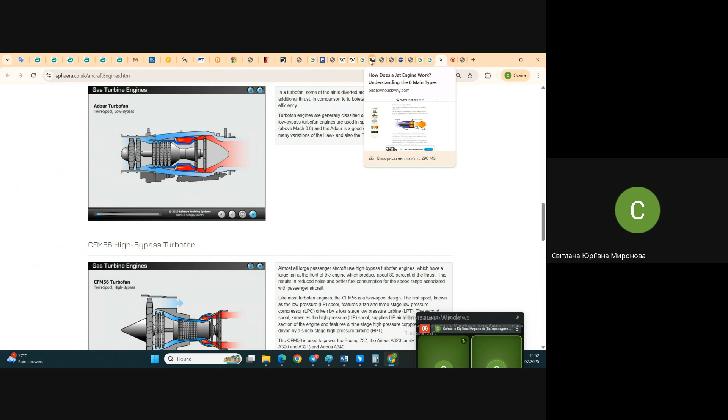So to illustrate my words about rocket engines - if I don't really remember, did I prepare it or not before? I forgot. I have prepared those simulators for you. Let me see the time. 19:52.

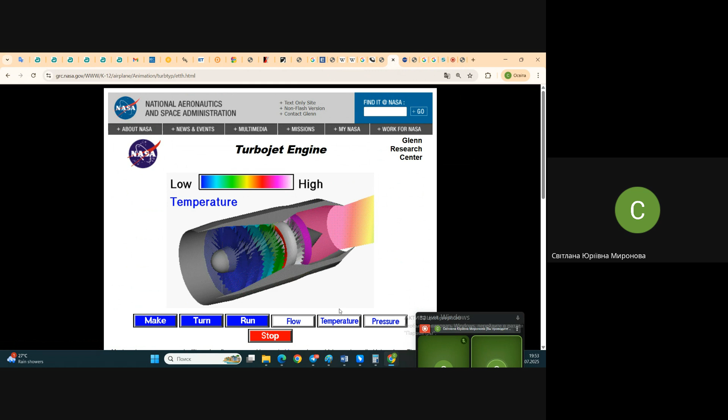To be frank, it's nothing much interesting, just to see the so-called core of the gas turbine engine, how it works. And the only benefit of those simulators is that the duct is clearly visible, and you may see different aspects of the flow inside: temperatures, pressures, velocities, and so on. And we may also see it for different types of engines.

What that is, is an engine with afterburner, you see. Here is an additional device which supplies additional fuel, and due to this it increases thrust production with practically the same air compressing in the duct of this engine.

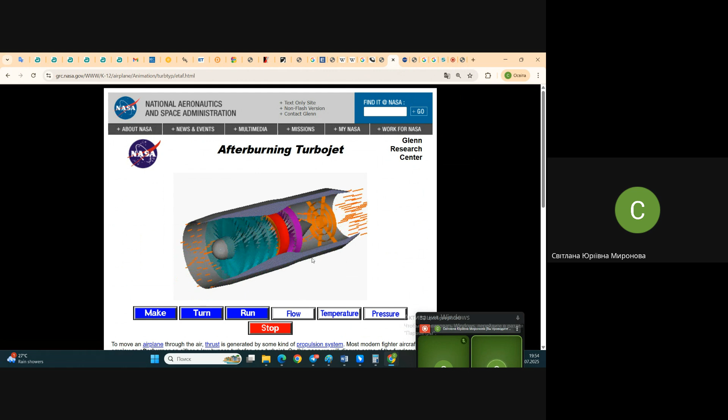So, no, we will not even try to use this simulator. Maybe somewhere here we might find also a rocket engine. I trust it's represented here. No, rocket engine. Oh, what do I? Rocket engine.

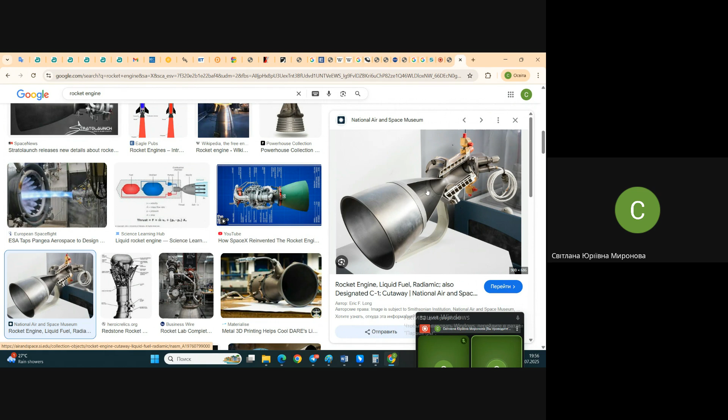And the intensive way is to use another principle of engine work. Like from piston engines, people came to the jet engine. For increasing efficiency of jet engines — well, the thrust of jet engines — people added the afterburners into these jet engines. And in our strive, because we are greedy people — yes, normally we'd like to save money, we don't like to waste money — because of our strive to save money for each kilometer of flight, we have the so-called bypass ratio engines, turbofan engines.

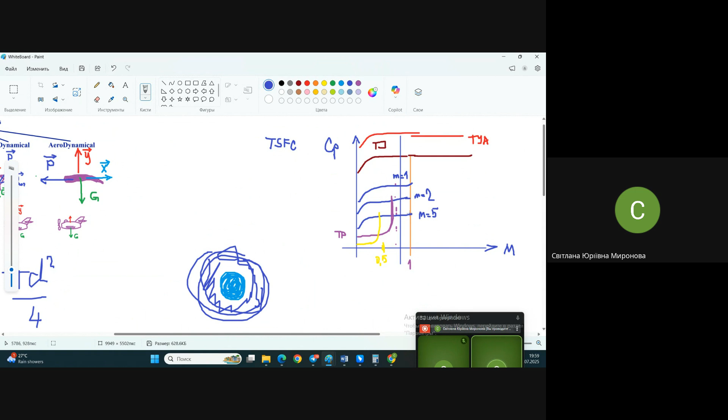I call it ducted prop, but really it's a little bit different from a typical prop. You do remember, I hope. Slides, where are you?

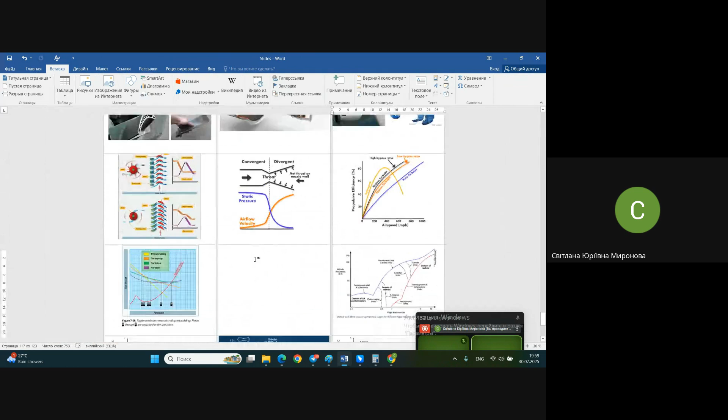Now here is a turbofan engine. Better to use that word. In this case, maybe we will see simultaneously some things. There is no turboprop here — my mistake — no, turbofan engine. The fan of the turbofan engine, what here is visible.

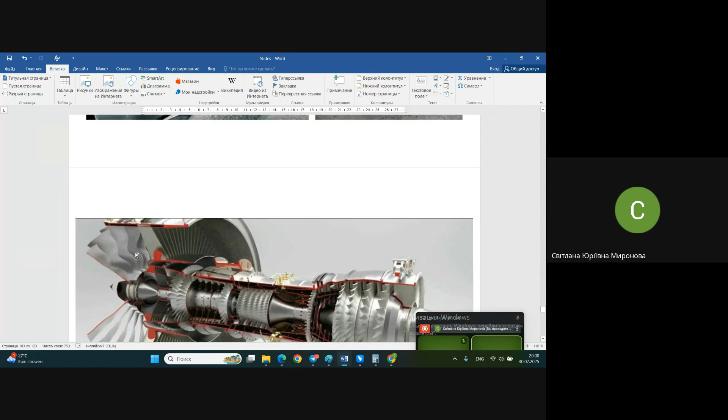It's almost the prop, but a prop usually has two blades, four blades, six blades. You may even place a couple of props on the same axis, one by one, for instance. They may even rotate in different directions in order to compensate the torque moment of the prop. But anyway, they are not as efficient as the fan — the prop, which is limited inside of a special channel, in a special duct, like this one. One more name for fan is ducted prop, by the way, in literature.

And these ducted prop engines, on one hand, may fly with higher velocity. They have fewer limitations in velocity than turboprop engines. On the other hand, anyway, they eat more than turboprop engines — they consume more fuel.